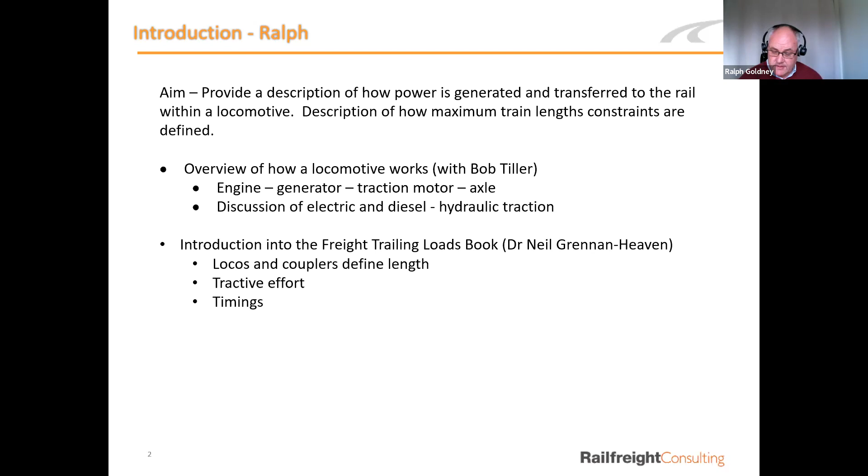So with no further ado, I think we'll make a start, shall we, Bob? I'll give you your first slide, shall I? Thank you very much, Ralph.

It's generally a very, very good system. And over the years, many locomotives, 47s, 31s, and 37s have all been powered exactly as we've seen here. The main difference in modern diesel electric locomotives is that they're AC, not DC. These locomotives with DC current have DC traction motors. The traction motor is coupled to the axle. In an AC locomotive, they have an alternator, not a generator. And that AC has a much better torque effect on the axle. The effect of the AC current allows a greater torque to the railhead and better control of the load. That way a lower powered locomotive can be much more powerful than an older DC generated locomotive.

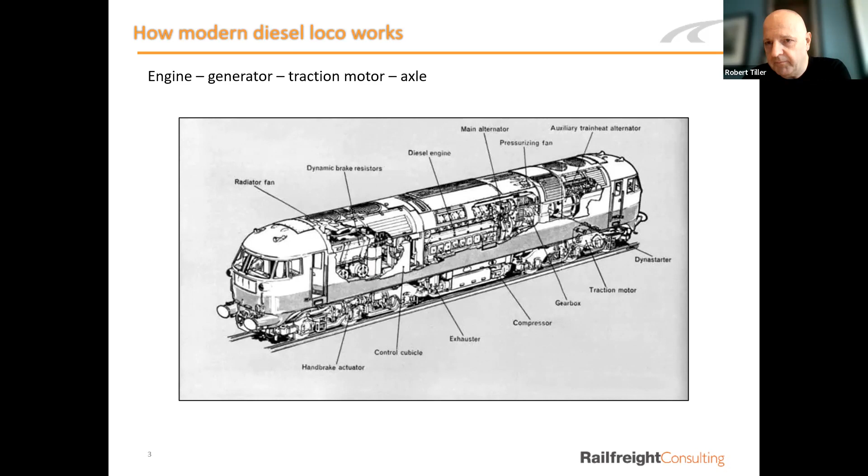Yeah. Is this a 66? I think probably, is it? No, I don't think it is, but okay.

Yeah. So the traction motor is just what, a couple of steel copper coils, is it? Just a normal DC motor, just on a much bigger scale, and it's capable of very high current. And so you've got two copper coils, one on the outside and one on the inside. An armature and a rotor. Okay, and then you've got a shaft that runs through, and then there's kind of like a gear mechanism that runs into this casing. Is that right? There's a pinion at the end of the motor. The pinion goes to a gear. The gear goes to the gear case wheel, and obviously to what we call the suspension tube or cannon tube on the axle.

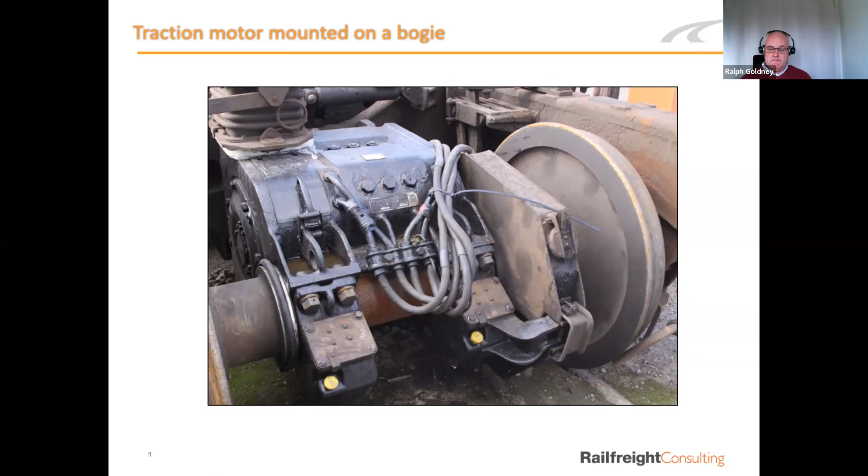The transformer then feeds through the main rectifier through a DC link. So you have an inverter. This controls the amount of current going into the traction part of the locomotive. So instead of having a diesel engine, you're essentially taking the electricity direct from the cable, and you've got rid of the diesel engine.

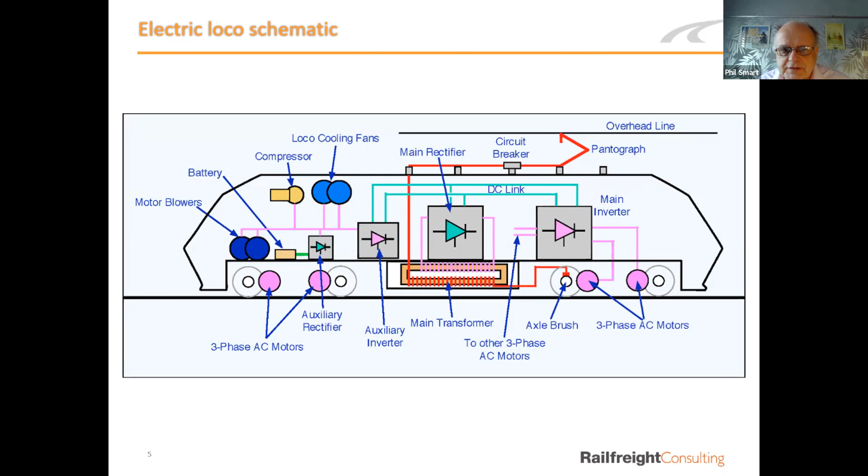Okay. The next one from Felix. What is the efficiency of 3 torque converters in series? I presume that's the one when we're looking at the Western class. So the efficiency at low speed is very high, but it drops off very quickly at higher speeds, because the oil itself becomes thinner as you become faster in speed. So the efficiency is actually reasonably low. It's probably about 60 to 70% at low speed, but drops off to about 40-50% at high speed, which is why the speed curve drops off.

Okay. And then finally, Mitch has asked, why did it take so long for AC to take over from DC? Cost. That is the simple answer. DC is very, very simple. It's very easily controllable. AC has been more of a revolution in terms of electronic control and in terms of size of motors available. And so that's why it's a question of cost.

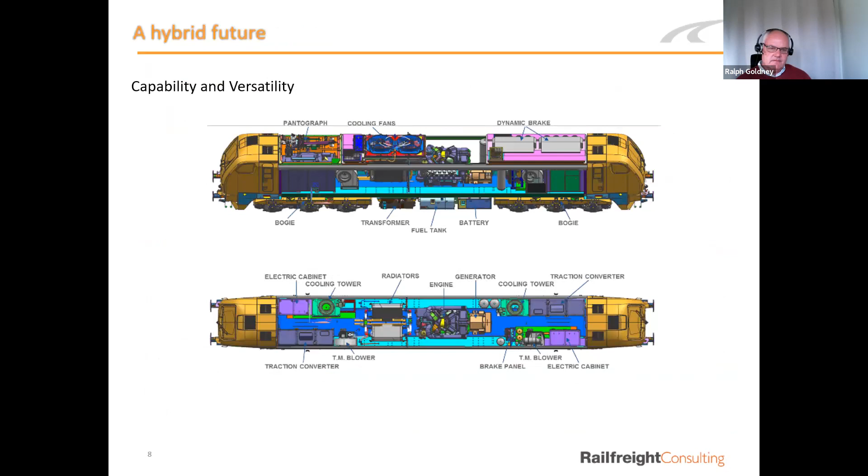Great. Okay, that's all for now. So let's carry on. Okay, thanks, Bob. Okay, so over to Neil. Neil, away you go, mate.

So I think one of the key questions is, what does this all mean for the industry? Which basically cares about how big and heavy the trains are that they can move. And what Network Rail has is the freight trailing loads books, and they cover coupler strength and what you can do with the available tractive effort from the locomotive. And it gives you a simple output, which is the maximum number of tons your train can be. And then there's a third element: how fast can you actually run the train? Can it keep to sensible timings on a constrained network?

Quite often on constrained bits of the network, it's the timings that matter. And then in a number of cases, it's actually the coupler strength and TE limitations that matter overall. Then there are a whole lot of non-train engineering related constraints, which are all around terminal and loop lengths, and physically a lot of terminal and track geometry.

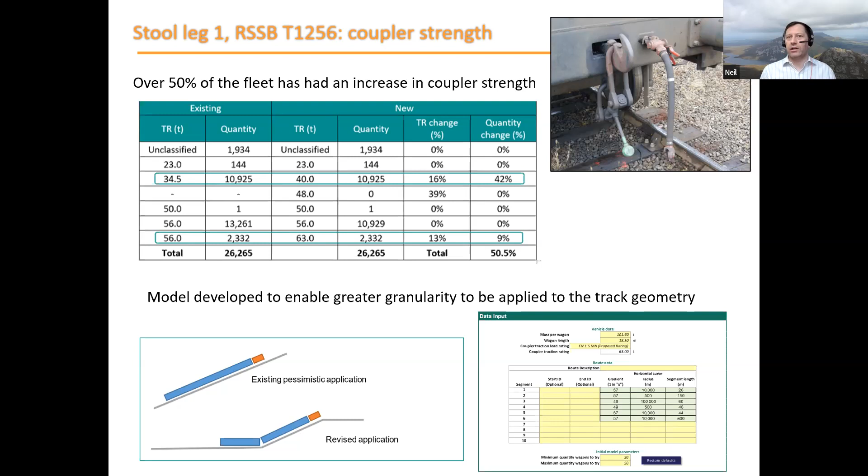Okay, that's going out through the industry at the moment. Yeah, it is. And one of the things that came out of 1256 was a definition of a new coupler strength, a 63-ton coupler, which isn't in the loads book at the moment. For the most recent wagons that Greenbrier have built, they've got a 1.5 meganewton European coupler fitted rather than the standard 56-ton UK coupler. So there's a few vehicles out there that are getting much stronger on that.

I think we're not going to get any further increase in coupler strengths, because actually the wagons are going to start having the ends pulled off. But there's some really great news here. So, okay. Yeah. Thanks, Neil.

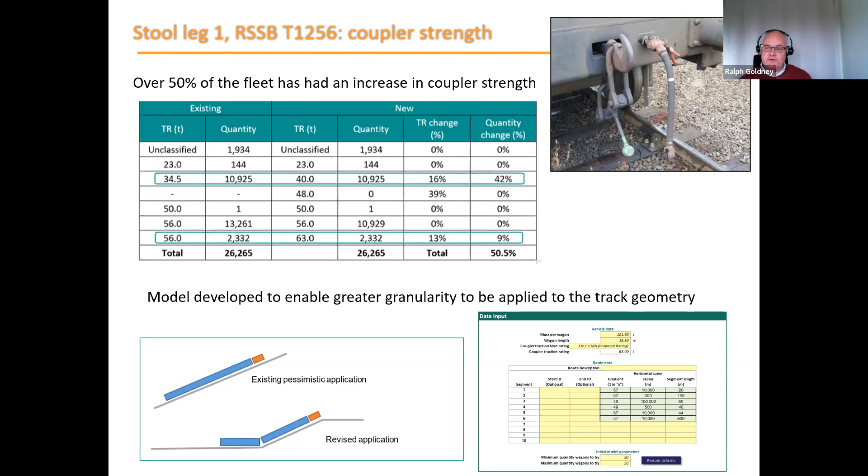It's worth mentioning the coupler is deliberately designed to be the weak link, not anything on the wagon. So you break the cheapest bit rather than the expensive bit. Yeah, this little bit here that's easy to fix. Yeah. So the chain links are effectively designed to break before anything on the hook does. Bit like a fuse, really, Neil. Yep, exactly. Okay.

So in terms of the tractive efforts, this harks back again to the work from 1967 onwards in MT19, and the outputs were defined as tables for 6 different radiuses of curvature between what they described as very sharply curved, and straight, and for a whole series of uphill gradients, on the grounds that it wasn't going to be downhill gradient limited. The calculations were mostly last run in 1986, and then a prototype off the drawing board for class 60 run in 1989, and that was the last time the code was run.

And it was Fortran 4, the code got lost. The IBM 360 it ran on got binned, and there's no documentation apart from effectively the input assumptions and the output tables. So recently we've actually been doing an RSSB project reassembling what the actual assumptions were and how the calculations were done, and how you can actually make this work for new locomotives.

So for example, one thing we have coming up is, say, Bob's class 99, which can produce a lot more tractive effort than you can actually get adhesion for quite often, say in autumn. So you've got to make assumptions around maximum adhesion in practice, whereas the performance of the late 1960s BR locomotives was comparatively so much worse that you didn't really have to worry about that, because it was limited by the performance of the locomotive, not the adhesion you could get.

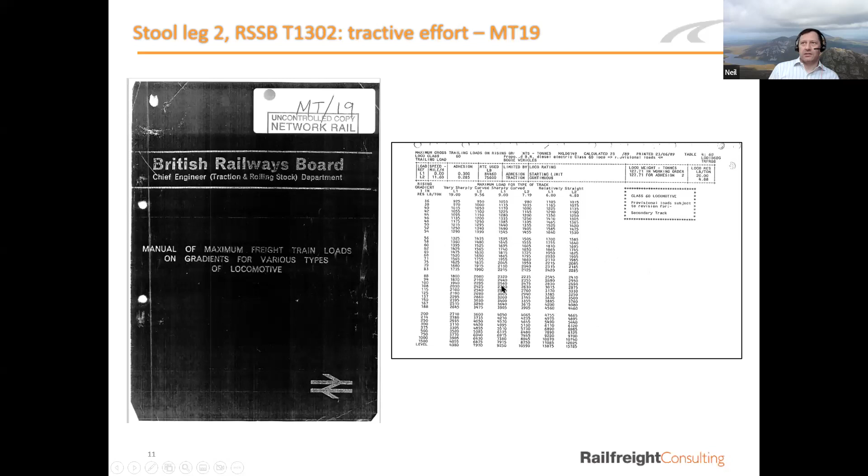So what we've done is just really simplifying what the mechanics of the original model were. There are effectively four components to the resistance: gradient, acceleration, on the grounds that it was mostly concerned with lower speeds, and you actually need to be able to start off and then keep accelerating and moving slowly. So you put a little bit of margin there. You're not interested in the net force being zero to move it. The tractive effort has always got to be something slightly higher than all the other resistances put together.

The mechanical resistances, so all the internal resistances to do with the wheels and the aerodynamics from within the train. And then the curving resistance is effectively extra effort to pull the trains round sharper and sharper corners as the wheel resistance goes up gradually there. Key thing on the tractive effort side of the equation on the left is you've got an adhesion limit, which is effectively a function of the weight on the axles and the actual friction you get at that point in time. And so effectively you've got an interplay there.

The older rules, largely it was always, you got everything the locomotive could provide because you were so far away from the realities of friction on the network, whereas now you've got so much better force delivery at the wheel that your adhesion, or your probability of getting adhesion, is much more of an issue.

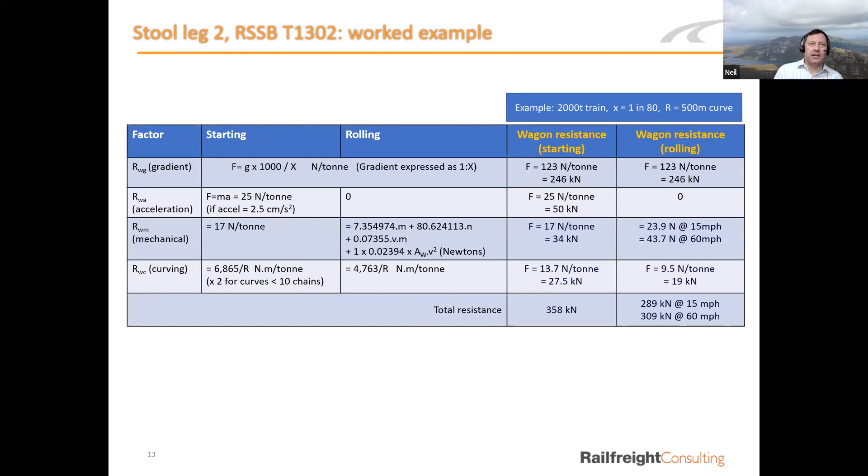We can see they did one tweak to what was going on in the 1980s, and they had an entire report with a follow-up report saying this is what we need to do to sort things, but they never actually fully implemented it by any stretch. They did pick the easy bits, did those changes, but left a lot outstanding. So that's some of what we're doing at the moment, addressing the outstanding issues that they identified but never addressed. Thank you.

So going back to one of Bob's earlier points, we've got a limitation, which is effectively on diesel engines, you're limited by the engine power because of the loading gauge and the axle loadings with the maximum engine weight. So what we want to do is try and get more out. And we effectively define that in terms of force or torque at the wheel from the available input energy. We've got a nominal efficiency versus speed curve for a DC traction motor.

On the main bit of the curve, there's a sort of sweet spot. So a lot of the locomotive gearing goes into optimizing that sweet spot and not having the tail off at the higher speed end. And then there's a pretty much straight bit on the left-hand side where the adhesion limit of the locomotive and the very poor low-speed motor torque of a lot of the DC traction motors comes into play. If you stay down in that bit of the curve, all the traction electronics get rather hot and they lose efficiency even further, which is really quite bad.

And that comes into what's defined as the continuous ratings for the locomotives, when the traction electronics get so hot they degrade to a low performance. And that's actually one of the criteria on the network, to gauge that. But with the newer traction electronics, that's no longer relevant because you can no longer get the electronics hot enough to degrade the efficiency enough to limit the performance.

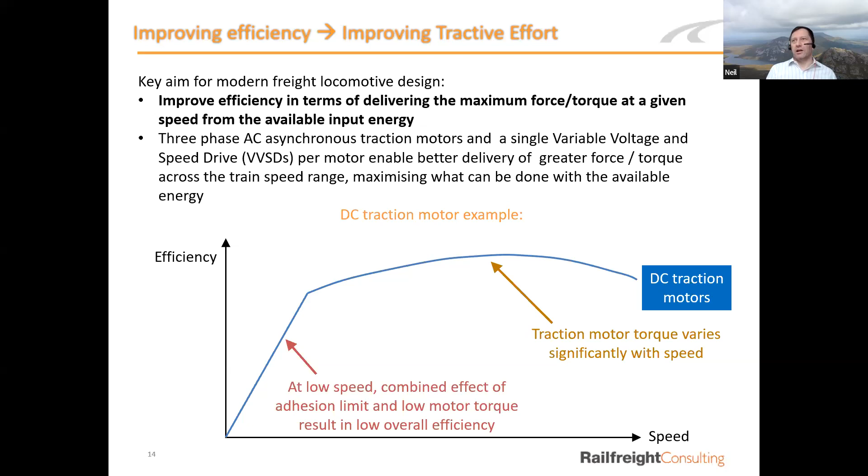So when we look at modern 3-phase AC drive systems, you actually get a much flatter torque curve for most of the right-hand side. That makes it far easier for the computer systems to deliver what the driver wants. And the curve is higher up, which means more of what you try and put in gets delivered to the wheels. And that's a lot better overall. That means you can haul more. And also on the left, the point where you go from that straightish line to the curve has moved further up and to the left. So that's all good for better low speed performance and efficiency, and that helps with getting the electronics less hot.

Typically DC systems are probably about 75%-ish efficiency overall, whereas some of the AC systems are about 90% efficiency overall. So there's a useful thing there. And you're getting that better efficiency over a much wider range of speeds as well, not just the optimum case. So this is reinforcing the point that Bob was making about how the AC traction motor delivers more power.

Yeah. And not only does it deliver more power, but interestingly, freight trains aren't often up here. They're normally going quite slowly. Yeah. And so actually we're getting a lot more power at the slow speed. And that also helps in the reverse case where you've got regenerative braking. Regenerative braking can be much more efficient compared with older systems, whereas on anything with DC, it was horrifically inefficient.

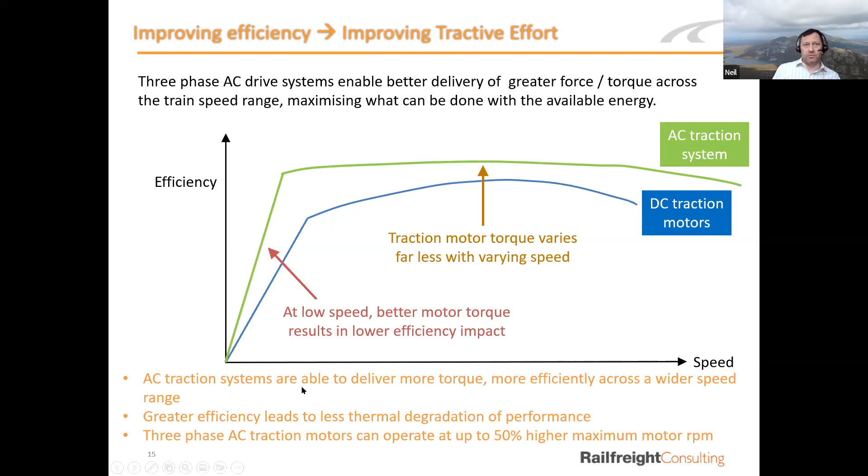Just linking to Bob's earlier point, the motors on the 99 are far lighter. Typically with an AC traction motor, for virtually the same characteristics, the motor will spin about 50% faster. That leads to nominally 50% more power you can get out of it, but then you adjust the system round to compensate for that. And what you say is, do you want 50% more power out of the motor? Well, possibly not, but you can go to far smaller and lighter motors, which are then easier to cool and you get better performance out of. Okay, thank you.

And you also get naturally very good wheel slip protection in there. Yeah, which is important. So the third leg of the stool is about timings. Yep. So on heavily constrained bits of the network, which applies to probably somewhere about half of the freight overall, timings matter.

But when they say timings, people automatically think of speed. What you actually need to think of is pace, which is effectively time per unit distance. So in the rail sense it's effectively seconds or minutes per mile, because that's the way the sectional running times work and that's the way the timetables work. It's all about pace, it's not about speed.

So the sectional running time, Neil, says that you've got 90 seconds to get from Battersea Junction to wherever it is. So the section is a section of track, and the running time is the maximum time you can be in there before theoretically you're causing delay to the train behind. Is that right? Yep, and it's in 30-second increments. Yeah. And sometimes fudged a little bit around the edges.

So effectively nudging those times down even a couple of seconds over a number of sequential segments can really help. And going back to what you said, Ralph, about the trains operating often a lot lower down in speed, the increments in pace have a far bigger change at lower speeds. So improving what you're doing at under 50 miles an hour has a much bigger impact on freight trains than at higher speeds.

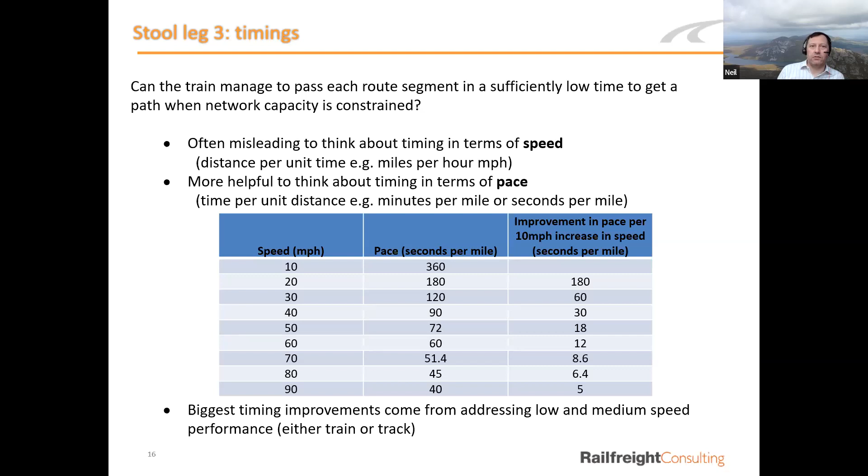You start taking the speed up, the difference in deliverable tractive effort then goes up hugely. So you're actually looking at more than 100% increase in tractive effort as the speed picks up beyond 25 miles an hour, up to the full 75 mile an hour max for most freight. So that means you can do hugely better timings, and the ability to get paths where they don't currently exist should be better.

So Bob has given us the traction curves for the 99s, and we're going to put them into the model that we showed earlier. And I think one of the benefits of the 99s is not only will they be able to pull longer trains, but they're able to do it a lot faster. So that's a big deal.

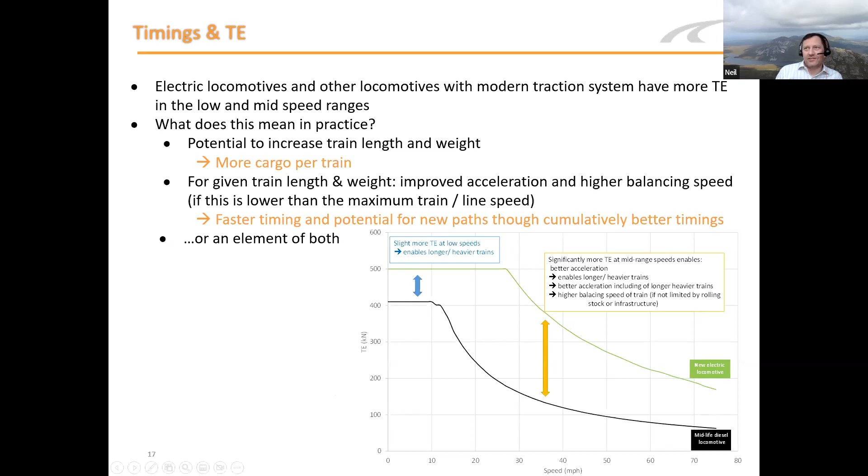Thanks, Neil. I think that's the end of your section. Is there anything else that you wanted to cover off? No, I think that's it, any questions. Okay, I think we've just got a second, Bob. Any comments on Neil's, anything you'd like to add that people might find interesting? I think it was extremely interesting and very comprehensive. So thank you very much, Neil.

And really, Neil's confirming the benefits of AC traction over earlier DC traction, and confirming the fact that weight is everything. At the end of the day, you can't get away from the fact that there is a calculation that takes you from the railhead to the wheel, which is weight and the gradient and the load and everything else. And Neil's very well explained that. And I think it goes to show that we're all moving in the right direction in terms of motive power.

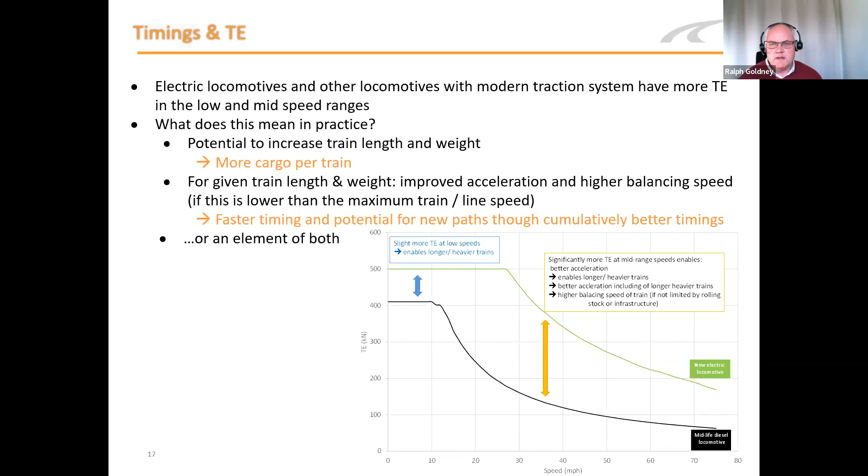Yeah. Thanks, Bob. I think, Phil, we are done. Great. I'll hand back over to you for questions. Thanks a lot. Yes, we've got a few questions.

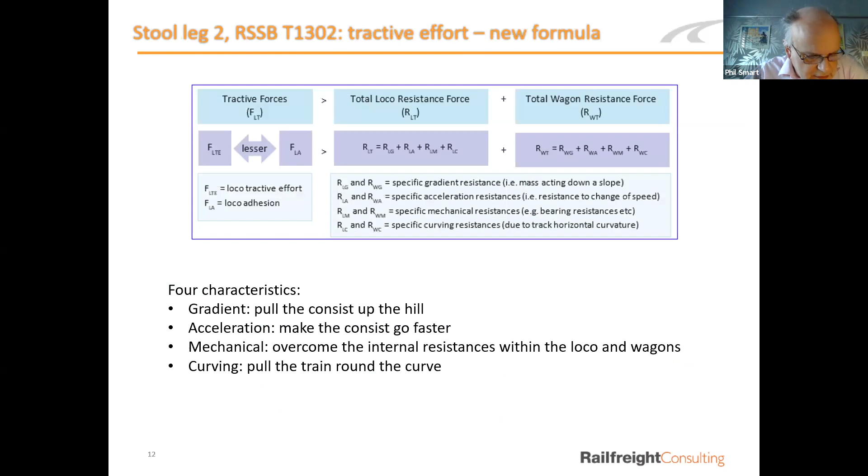So going back to the tables that you showed, which... the limitations of train length and weight. There was a question from someone who said, where can I access this information without asking Network Rail every time I need route data? So I think you mentioned at the time that the intention is to digitize all of this stuff. Is it going to be something that is more widely available?

Well, the first thing is that it is Network Rail data. But Network Rail are very generous in sharing their data. I think all the freight operating companies have got access to the loads book. I think if you wanted to get hold of a loads book, if you asked somebody at Network Rail, it's not secret information, although it's not widely available. So I think that's the first thing to say.

The second thing, I think finding the people with the spreadsheets is usually the issue. Yes, but certainly most of the route freight managers, if you contacted them, I know Mark Bridell and many of the others have got access to them, and so they would be able to share them. But it is their proprietary data. Yes, Network Rail are planning to digitise this.

If you compared this with some of the European infrastructure managers, it is a bit antiquated. They've got digital systems where you can say, well, I want to go from Rotterdam to Lucerne, and it'll just tell you what the constraint is, and you need to know the worst situation. So DB is probably the best overall, and most accessible. Some of the others can be a bit hidden as well, even though they do exist.

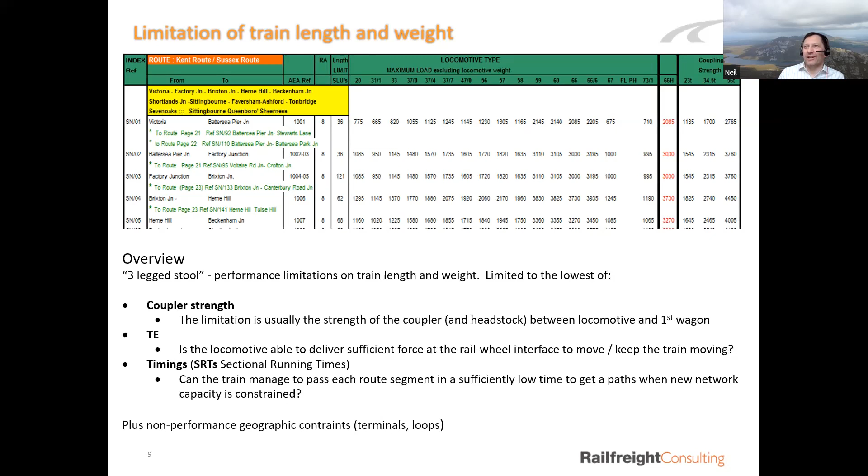Don't forget, Ralph, that the size of those motors has gone down. We did have huge, big DC motors. We've now got much smaller AC motors, which develop more torque and are more controllable. Yes, thanks, Bob. Because I'm really thinking about 66 rewinds that I saw. So yes, absolutely. And the need to rewind anything on the AC side or rebuild them is several factors, orders of magnitude lower, because you don't have carbon brushes and flashover problems, and the thermal management's far better. So they may be getting less business in the future, with AC traction motor rewinds needed once in a blue moon. You don't have commutators and carbon brushes, Ralph. It's AC drive, so you have a much cleaner motor, no carbon deposits, much less risk of ionization and flashover.

Big words. Thank you for that. Just perhaps a reminder that we don't really encourage commercial breaks on these webinars, but I'm sure the company you referred to is doing a good job. The rewinders are available. Yeah, exactly.